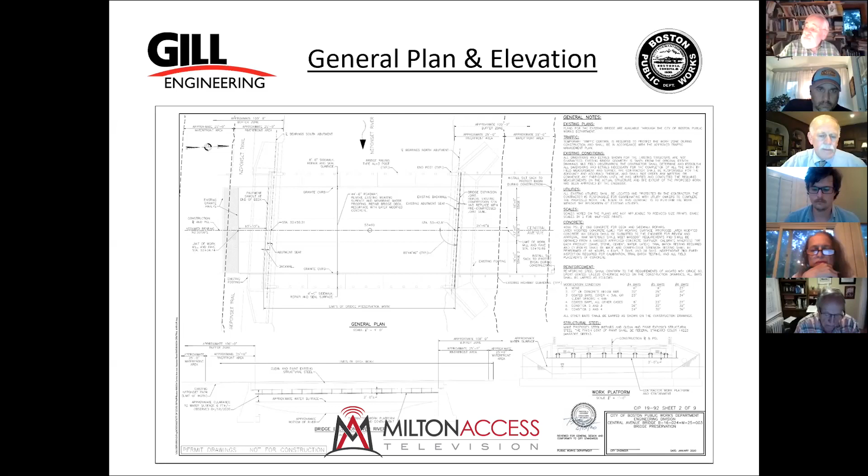Yep. So this shows the resource areas and the limits of work. On the Milton side, we'll be limiting it to the path on the Neponset Trail. So that's going to be the extent that we'll be doing the resurfacing. So Joe, if you want to move on to the next slide. This just shows the cross-section and the general staging of the work. Everything, again, will be contained primarily within the road surface on the top side. A little bit of maintenance work will be done on the sidewalks.

Joe, if you want to proceed. So this is a photograph of the top side. You can see the condition of the pavement, and that's the primary focus, again, that we'll be doing here. Joe, if you move to the next one. This is the underside. So from here, they'll be slinging a work platform, and the steel beams will be cleaned and painted. And in this view on the right, you can see the bucket when we were out with the bridge snooper doing the inspection.

Joe, if you want to move to the next. And this is just a view of the traffic setup they'll be using. The city will be coordinating with the MBTA on relocating the bus stops and accommodating pedestrians. Preston, one other question. I should know the answer to this, but I don't. And that is, what's the status of the sewer relocation project that put the pipe over the top of the bridge? I can touch on that.

MWRA issued a notice to proceed, I want to say the 6th, whatever last Monday was. Their intent is to run the bypass on the north side, I believe. It'd be north, or up in the picture that we're looking at now. Their plan is to be out there until about the end of the year, at least for this particular portion of the job. We're looking to see if some of our work can happen concurrently. The topside work obviously can't while that's there, but we might be able to do some of the underside. So we're working that out with our contractor to see what they think is feasible, and we'll talk with the MWRA to see if that works for all involved.

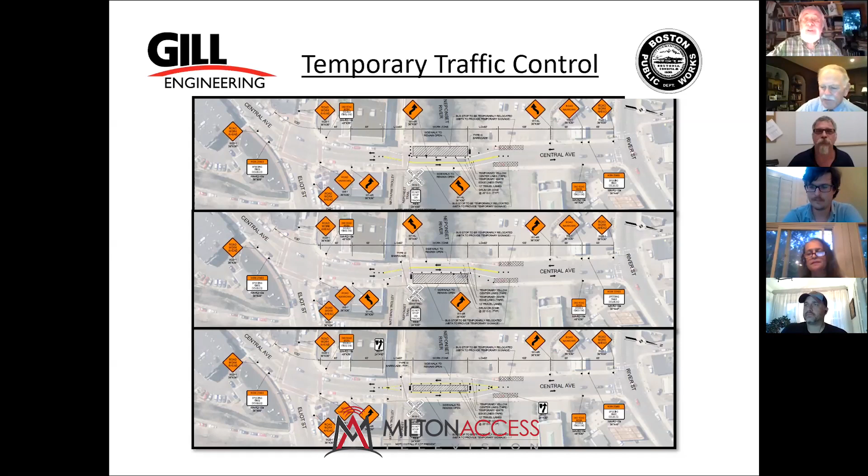Thanks so much, everyone. Thank you. Thank you. Good work. Have a nice night. Thanks. Thank you. Yep. All right. That'll be a nice enhancement. Yes.

Third on the agenda is a request for certificate of compliance at 750 Randolph Avenue. That's the gas take station. And Shauna, are you there? Can you see the VHB screen? Yes, I can. Great. For the record, my name is Shona Patasteas. I'm with VHB and I'm representing Boston Gas Company.

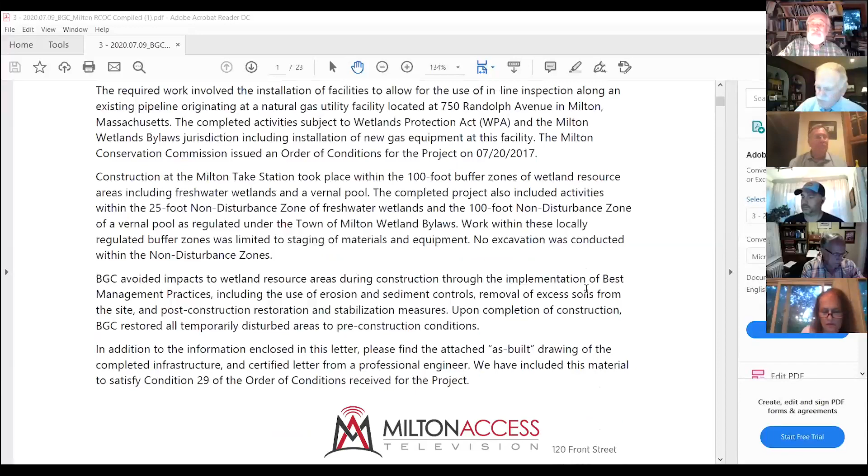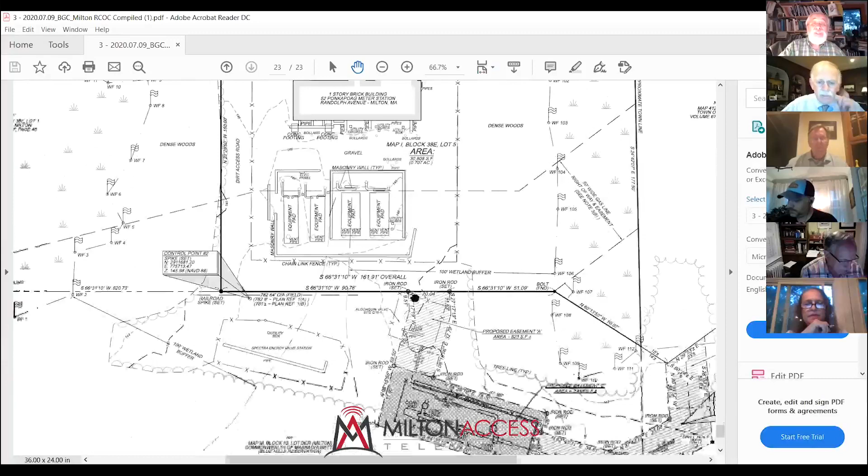It might be easiest, Steve, the very last page is the as-built plan. I can kind of describe the project. Okay, we'll get there in a moment. There we go. Let's see if I can zoom in a little bit for you. You want to go there, right? Is that correct? Yep. Good. Excellent. How's that? Great.

So this project started in 2017. It was an upgrade to an existing gas line that's in the area. It's a station that's off of 750 Randolph Ave, but it's right at the northern extent of the Blue Hills. It's behind a golf club up there. The name of it is slipping. Quarry Hills. Quarry Hills, that's it, yep.

The project was to build a PIG receiver. PIG is an acronym for Pipeline Inspection Gauge. It is above ground infrastructure that essentially allows you to put a tool into and out of a pipeline that cleans, that inspects, and is generally an upgrade versus the current inspection techniques, which I think are X-rays. There's a number of different above ground methods. So this is an inline, interior pipeline inspection tool.

They built a receiver in the gravel yard outside of the station here, and also changed out the elbow, the bend as it goes around the corner and up toward the north. The town municipal line is right in the elbow there. The Milton side of the work was really in the 100-foot buffer zone.

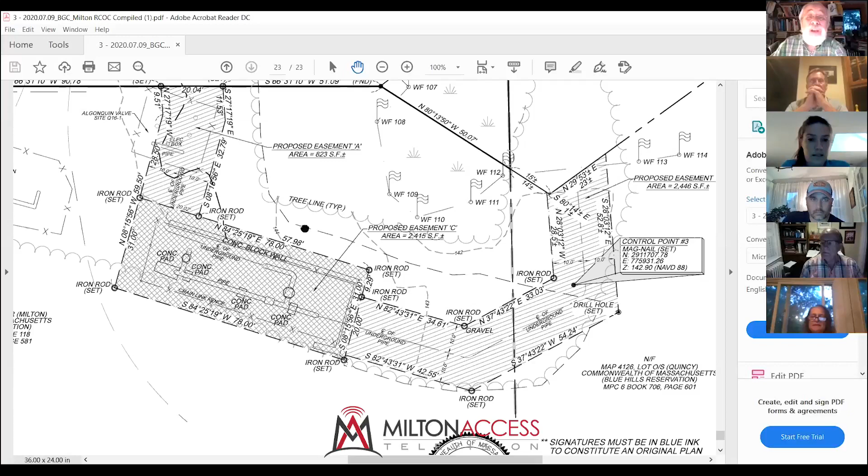And when I visited on Saturday, it was a very warm day, and I did see a spotted turtle moving from the east to the west across the access road, which is just to the northwest of this location, which is sort of neat.

Did we lose John? I think John and Ingrid. Yeah. Very curious. Here. John's on, good. I see Ingrid. I don't see John. Huh. John's muted. Okay. I wonder if that happens automatically. He came back. I'm sorry, I was actually talking there for a while. My internet crashed and I picked up another connection, but I was able to hear everything. Okay. Did you want to repeat what you had to say, John? No, I was just asking if there were other questions from commissioners or abutters and members of the public. It doesn't sound like it.

And Steve, I had the one question, and I may have missed this when my system crashed there briefly. The yellow cones that were going to be removed. Oh, not yellow cones, orange fence. Orange fence, okay. A little bit of orange fence. And Shauna has said that they will take care of that. Yes. Are there any other erosion controls still present, or have they all been pulled at this point? Everything's been pulled. And that fence was probably 50 feet off the access road to the north. Okay, that's where that fence is. On the ground, of course. Steve, you found your way out of that place. Good place for a fence.

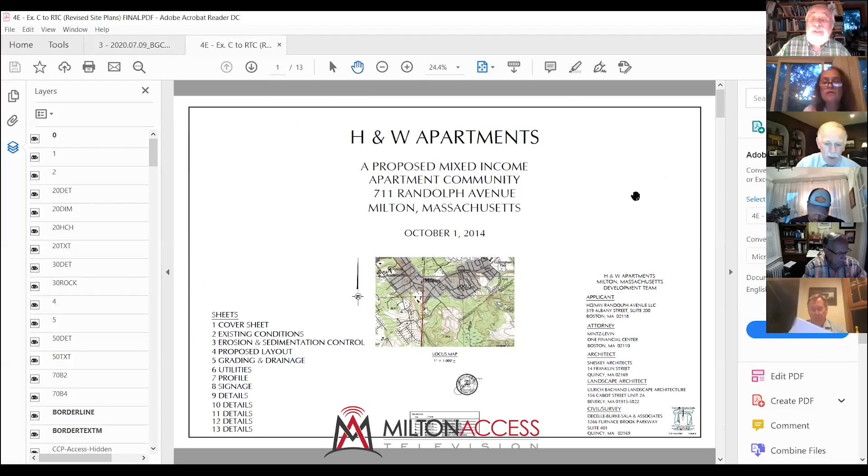All right, next on the agenda is number 4. That's notice of intent 693 to 711 Randolph Avenue. This is a continued hearing. Okay. All right. I'm going to put up the plans, I guess, right? How's that? I think so. I'm sure we're going to be using them. Yes. Okay. Let's see. Gesundheit. Excuse me. Thank you. And share screen. Come on.

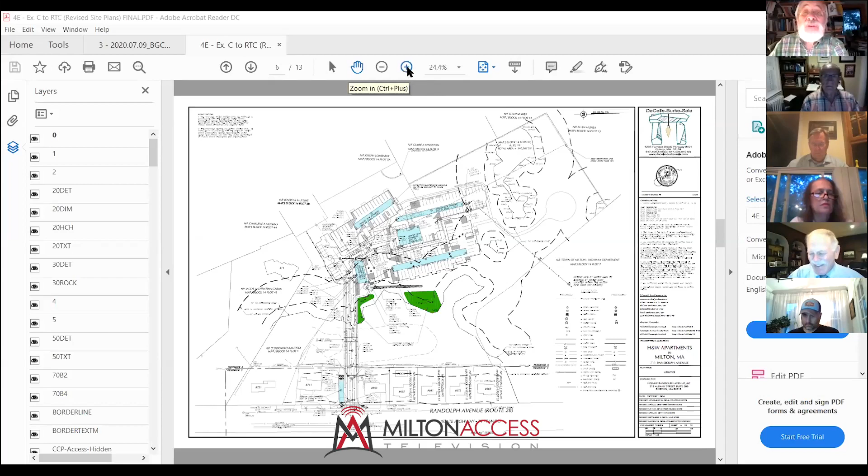And do you see it up on screen? There's a plan. Is it shared? It is shared. It's too small for me to tell what number that is. Happens to be one of the plans, that's all. One of them, okay. Is there a place you want to go, Brian, or anybody with you? Well, Scott Morrison is on the line. Jim Burke can't be with us tonight. But Mr. Chairman, I didn't know that we needed to make a presentation. We just received these materials. We can certainly speak to them at a very top level. But we had assumed that the commission was going to continue to ask its questions this evening. Yes, and I understand that completely, and I think that's fair. I don't have a particular agenda, but I note that the questions were asked, and I'd rather the questions were addressed in written form.

My initial concern was that at our last meeting, I indicated that I had a couple of high points. One was, is it constructible, given what I anticipated would be a collapse of the trench. And I think that has been addressed in terms of metal sheeting, box culverts, and the plywood. I don't get that one, but putting that aside for the time being. My other major point was a hydrology study, and I'm still looking for that. I know it's kind of swept into the alternatives analysis, but that looked to me more like a construction cost analysis. And I recognize that cost is a component of it, but I'm still looking for a hydrological survey that would indicate the impact of mounding. And that is the difference between the abutment structure with the culvert as opposed to the pier suspended plank bridge structure. I'm still looking for the water analysis of that. And Brian, you may be able to, or maybe Scott could address that. That is, if you have any intention to give us a hydrological study.

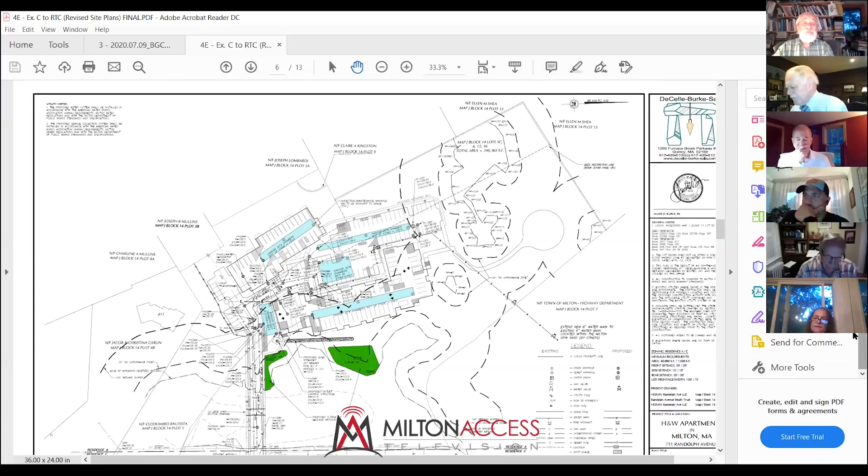Being an optimist, I think we'll correct this technical glitch shortly. But if it goes on too long, we can actually go through the report and the responses to the applicant's responses, because I did have some additional individual questions.

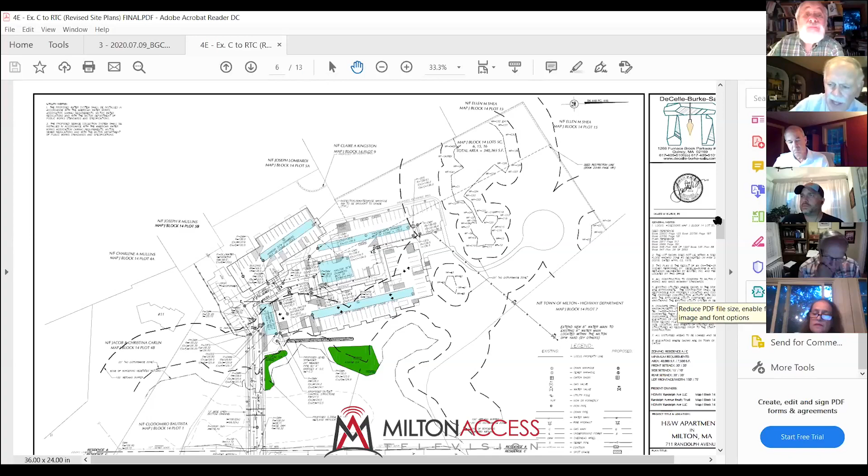And Scott, the first one that I've got is, there seem to be a number of questions related to separate and distinct wetland replication areas versus putting all of them into one contiguous area. And there seems to be some controversy over that. Is it possible from the site plan perspective to put the replication area into a contiguous plot? Yeah, this is the second round of comments we've got on that. It sounds like the commission and CEI's preference is that we combine that into one location.

Based upon the CEI letter, it appears that... Hello? Hello? I think we've got somebody. Hi, it's Matt. Okay, Scott, do you want to? Hi, it's Matt. Sorry to interrupt. I'm only on by phone, so the phone number had to be muted on your end. All right, fine. Scott, do you mind just deferring and let Matt address the first issue? That's fine. Hey, John, can you hear me? Yes. For Matt on the phone, it's just *6 to mute and *6 to unmute. So if you become muted, you just hit *6 and it'll unmute yourself. But you're unmuted now. Okay.

So I heard the question. Plywood will not work for the sewer extension. Our understanding, based on their presentation at the last hearing, is that for the utilities, they'll be using trench boxes. I think the only place the plywood may work is when they're installing the footings, which they clarified for the culvert itself would only be about 3 feet deep, and they're very narrow footings, only 2 or 3 feet wide. They may only need a piece of plywood at the end, inside the limit of the silt fence, to hold back that soil, because it's such a short, narrow excavation along the wetland line. For the deeper ones, they'll have to use trench boxes.

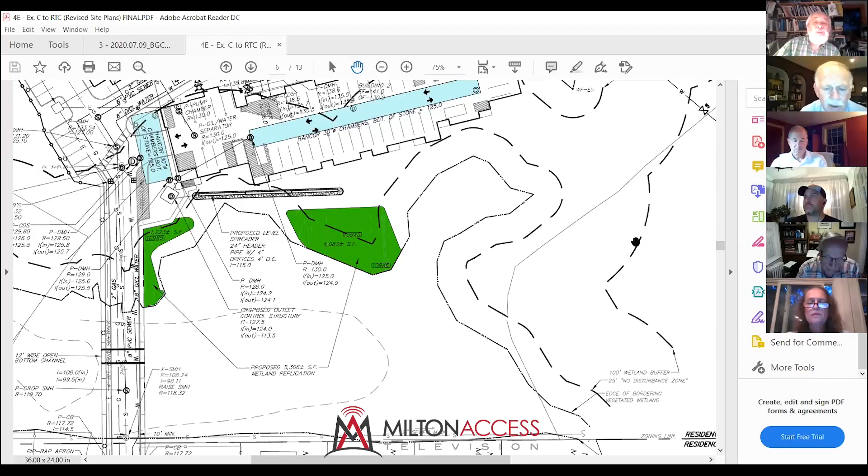Sure. Scott, do you have an idea which plan? Give me one second, let me see if I can flip through and find it. Let's see. It's not that one. It's not that one. Not that one, certainly.

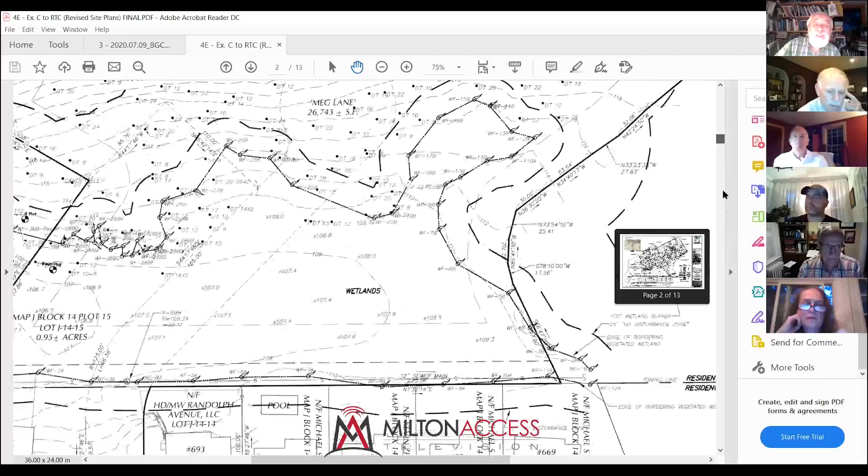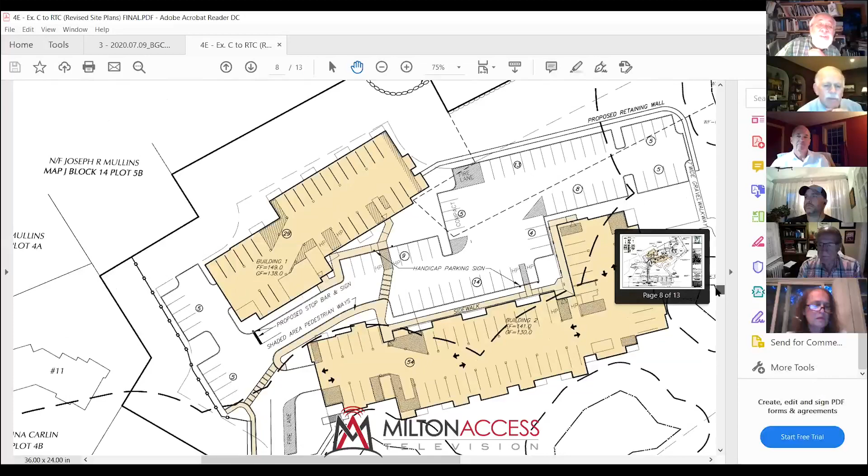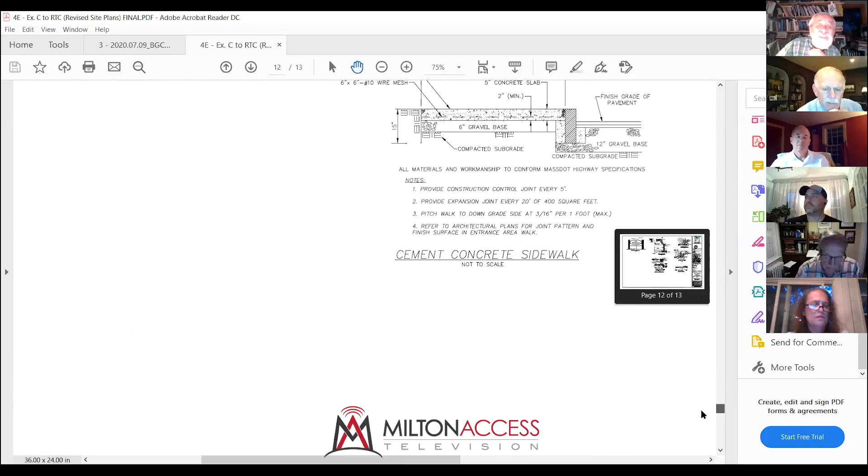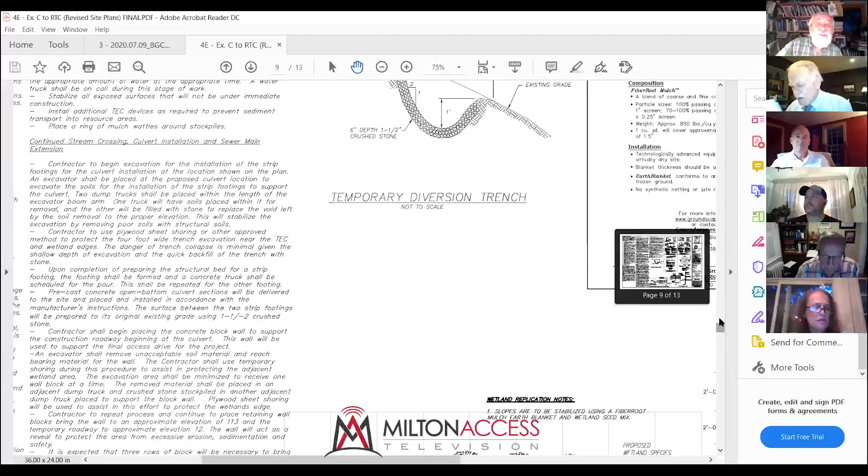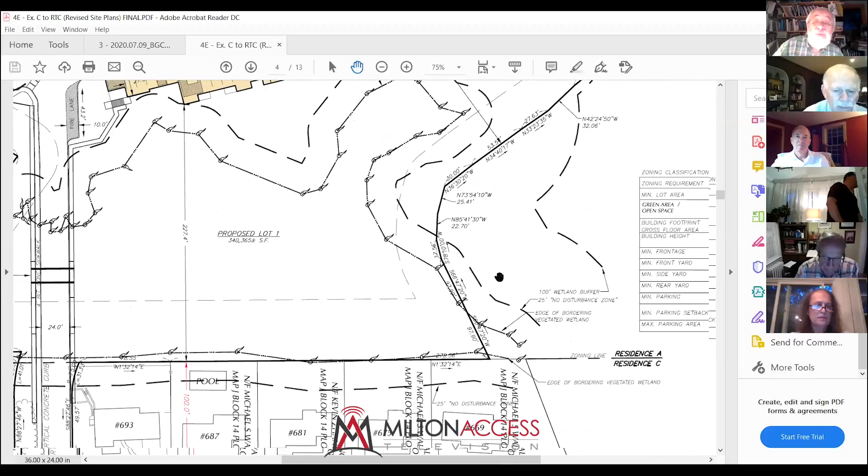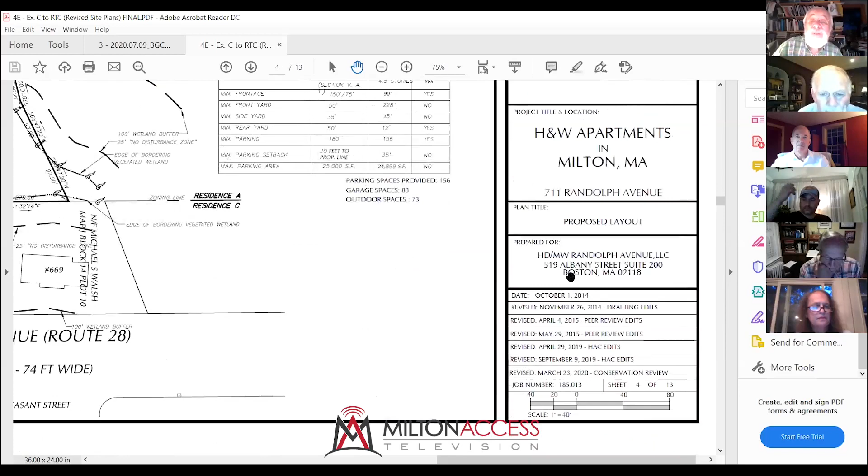Scott, can you try specifically to address this? Go ahead, somebody, try sheet 4. Sheet 4, okay, let's go up to sheet 4. Let's see, this is... that's 5. Is this 4 here? Let me just check and see if I can see what sheet this is. This is sheet 4 here. Okay, I'm on sheet 4.

Let me zoom out. I don't see snow storage areas on that sheet. Do you, anybody? I'm sorry, I may have thought I saw it on the wrong one.

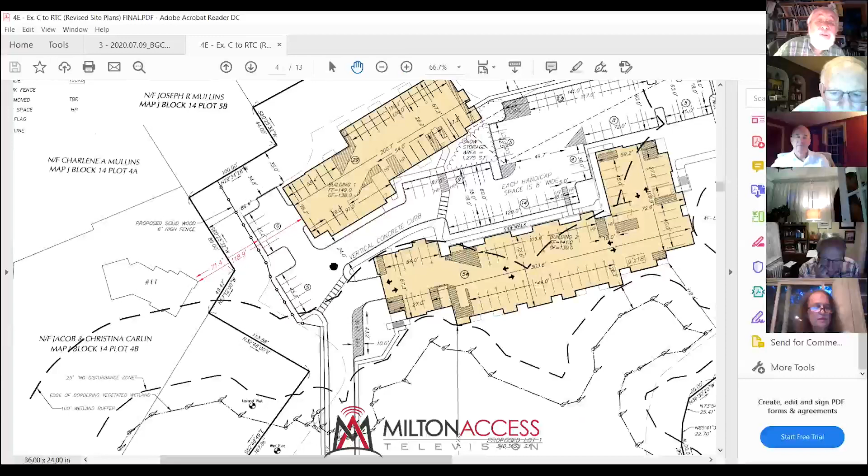Yeah, that's fine. I do recall that there were all the snow storage is within the vicinity of the parking areas. Yes, I recall the same thing, Scott. Somewhere, I believe there was some in here, and some in here, and maybe some in here. Is that correct? That's my understanding, yes. So the intent was, if possible, to get that to drain, melt, and then drain back through the stormwater system.

Right. Yeah. Yeah, I agree. And Mr. Chairman, apparently the O&M manual provides that only environmentally safe de-icing products will be used on the site. All right, thank you, because I did not have that in front of me.

How is that defined? Does the manual define what environmentally safe means? It's very subject to opinion. That was the question. Scott, I don't know if you can answer that. Did you hear, Hans? We can provide additional clarification of that. Fine.

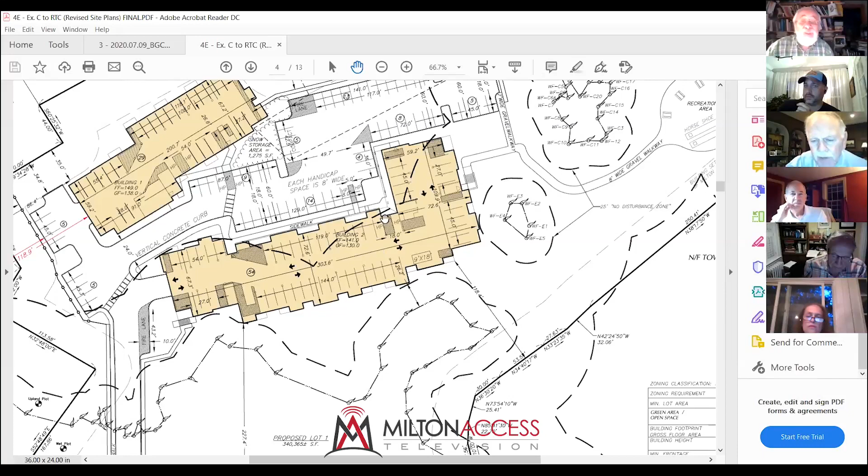Are you talking about 699 Randolph? I think it is 699. Abutters in general. Steve, if you can move that screen down so we can see Randolph Ave. Sure. Yeah, yeah, 669 here, right. 7-Eleven there, and there's a few houses in between.

Right, so last time, my memory is the commission pointed out that 669 -- sorry, I have the wrong number, I'm saying 699 -- had submitted an ONI, and I know Jim asked for those materials and got them from Kathy, so I know he's baked that into his thinking. All right, good, that's important to us.

And if I can go backwards just for a minute, because I passed over something. I see there are a lot of comments suggesting that the limit of work should be surveyed onto the plan. Is that an issue for anyone?

I was one of the ones who made that comment, John. I think Hans made it as well, didn't you? Yes, I did. It's all over all the reports. Right, and I just didn't know if, from the applicant's perspective, there's any objection to that.

Right, so again, apologies for Jim being unavailable. We really need to caucus with him before we can answer that. Okay, but we will get back to you.

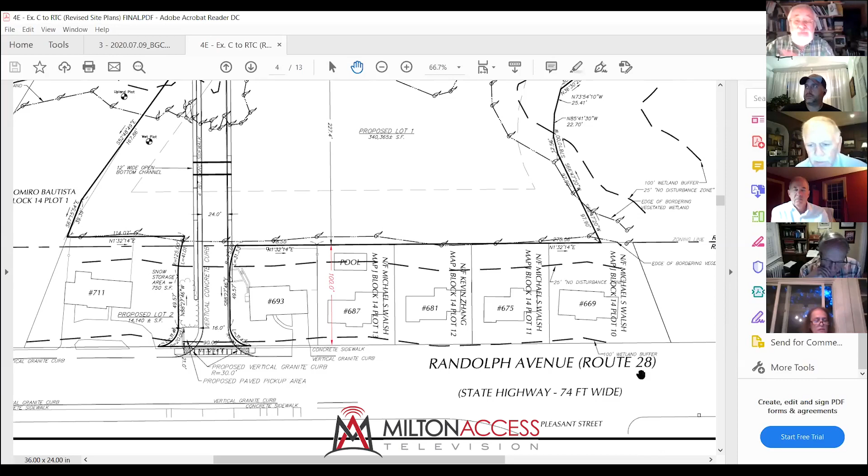And that might be a Jim Burke situation. Yeah, Scott, is that a Jim issue or a Scott issue? I think it's mostly a Jim issue, but we can make it very clear on the plans where the dewatering's going to be located, so there's no question about that in the future during construction. I don't see an issue there at all.

Okay, all right, well, just put that on your list of things to address, if you would, please. Hans, did you have any other questions?

No, I mean, I do look forward to seeing what any revised wetland replication is proposed as, and appreciate the willingness to consolidate that. Again, I think most of the questions or concerns would remain to what the hydrology study or response is. And I think we can just go from there.

The shoring question, I think we should be able to condition that to make sure it's executed appropriately, which hopefully the contractor would do anyway.

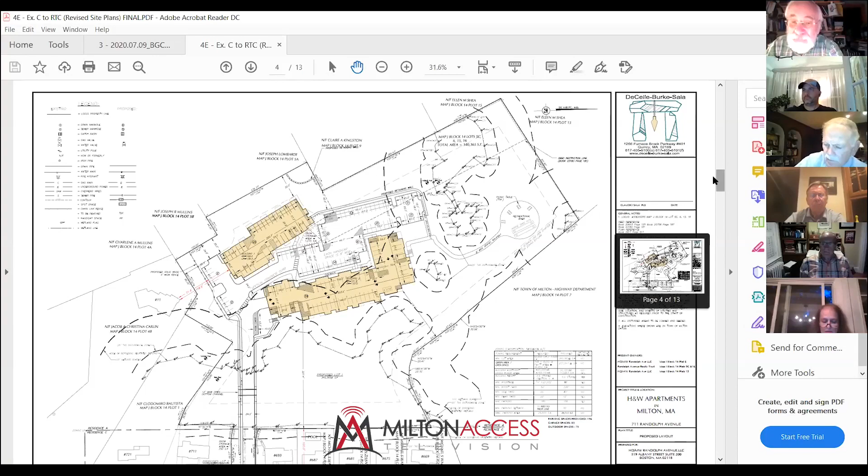Just generally, Jerry, those proprietary treatments basically use centrifugal force to separate the water from the sediments. Most of them run the water around in a circle, and the sediments drop out while the water stays. Would you agree with that, Scott? Yes, and just for clarification, those are shown on the plans, on the detail plans. So there'll be deep sump catch basins and then a proprietary treatment before it reaches the infiltration system. Right, okay, thank you, that's helpful.

Anything else, Jerry? No, that's it for now. Thank you, John. All right, Ingrid, I can't see you, but any questions or comments? Steve, here, can you- John. Oh, good, there you are.

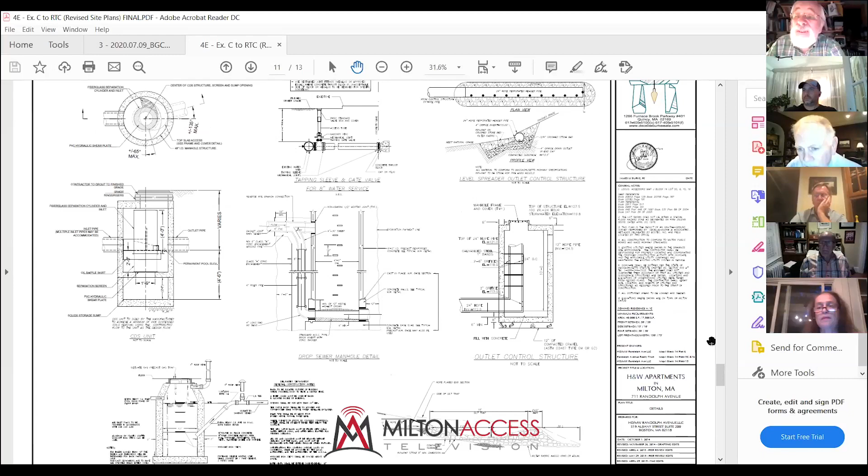I'm sorry, did you say you did have some questions or comments? No. No, you don't, okay, all right. And Arthur, I can't see you, but I think you're there somewhere.

I am, and I want to respond to the consolidation of the wetland replication plan, because approximately 50% of wetland replications fail within 3 to 5 years, and separating them out increases the chance of failure. Consolidation improves the chance of success. And I liked what Scott said about a buffer to protect the consolidated replication concept. That gives a greater chance of success.

And also a necessary ingredient is the periodic inspection, which I think I read in the documents prior to the meeting, which I think is a very positive feature as well. So it's on both the developer and on the Conservation Commission post-development to make sure that that replication area succeeds.

I just wanted to mention something to Arthur's point. Often with areas this size, an extended period of monitoring to make sure that it grows, and some backup plan for if the replication area isn't taking, is written into the order. We've seen that before. Beyond the usual 2 growing seasons.

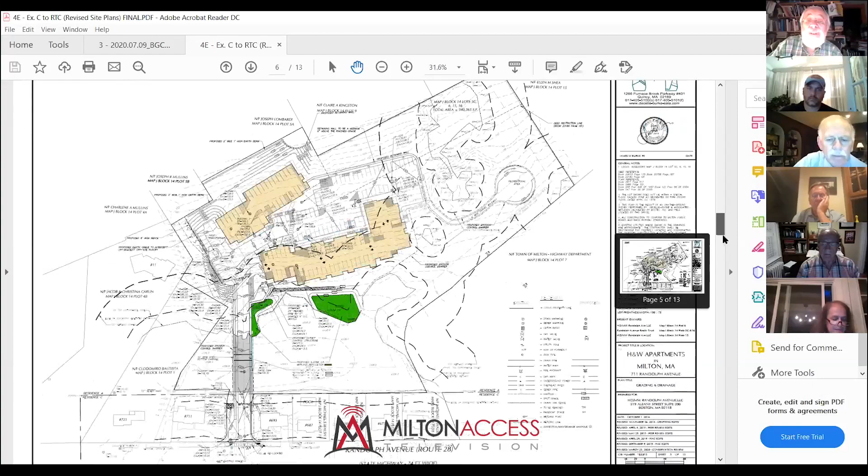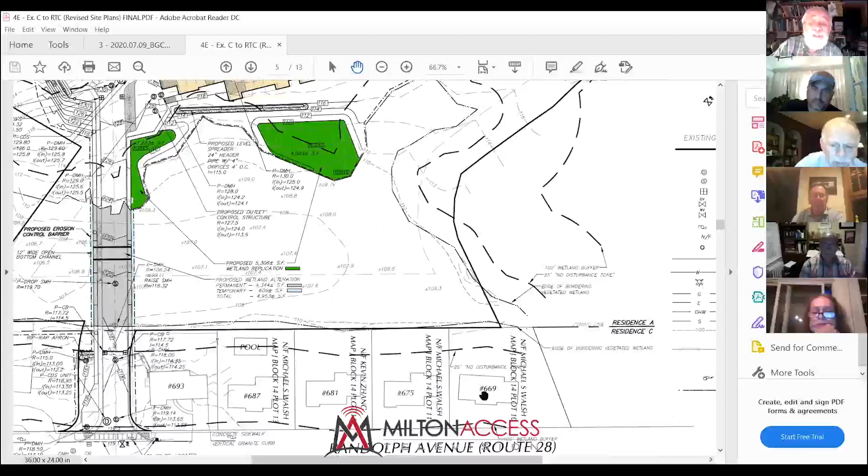Sure. Yeah, that'll do right there. That's fine. How about this one right here? Yeah, if you were to zoom in a little bit on that corner that's closer to 669. There you go. Right there. 669 is there. Yeah, so that's perfect.

So in general, what we're talking about is the portion of the wetland that goes from where you can see the 114 contour there, right? Just right here. More or less from there, perpendicular to the property line, following more or less the 114, and then dropping down to where the wetland line merges with the property boundary as you're going towards 669. That's about 7,000 square feet to work with.

So again, just in the interest of being complete, the reason that's good is because you've got the existing wetland there. Above it, it's more distant from the direct impacts of the proposed development and the buildings. It gives you the opportunity to do it all in one place. On the other side, it places a little more burden on the town's property to the north.

Mm-hmm. By building a replication there, you're giving up some of the forested buffer to the wetlands on that side, and you're making that new wetland fairly close to the town's property there. So it's just something to keep in mind in terms of keeping good controls on potential encroachment or issues that seem to be happening now up close to that property line. So it's just something to keep in mind as you're thinking about that moving forward.

Well, on balance, with all those things considered, I do think it's probably a good idea to move it over there. The upside seems to far outweigh any downside in my mind, but I just want to point that out. Thank you, Bob, for pointing that out for us.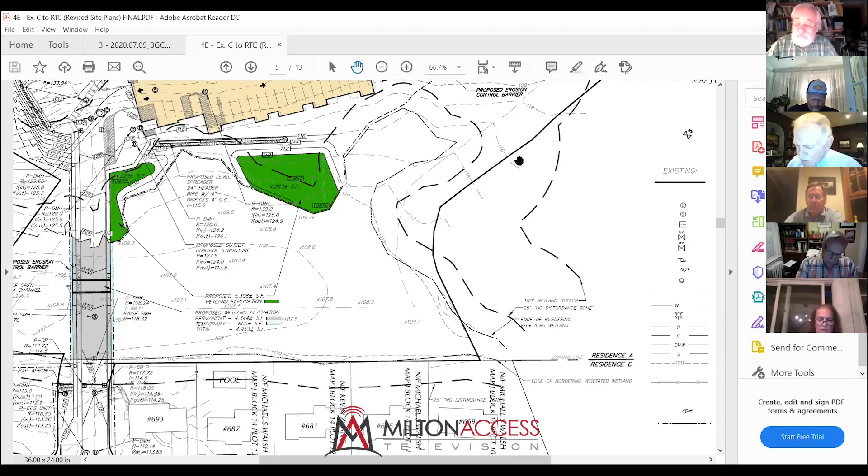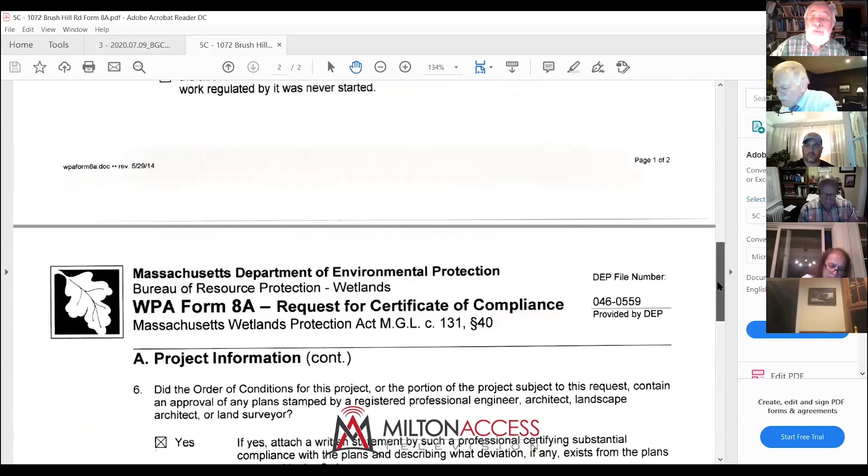We can move on to the agenda. I think next, number 5, request for a certificate of compliance at 1072 Brush Hill Road. 1072. Okay. Do we have anybody appearing for that? Not to my knowledge, John. I've been out to see the site. It looks very good. And do we have a plan? I'm looking for the plan. Yes, did you see a plan? Yes. We had it in hard copy. Okay, very good. I don't believe I have it in digital form here.

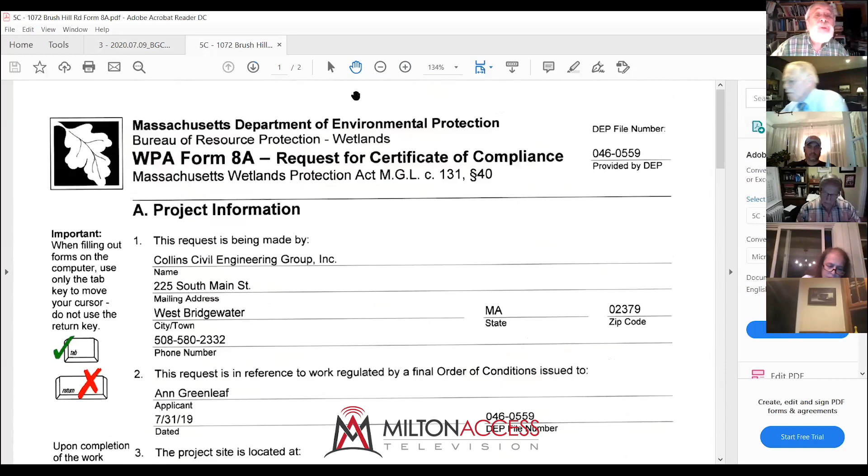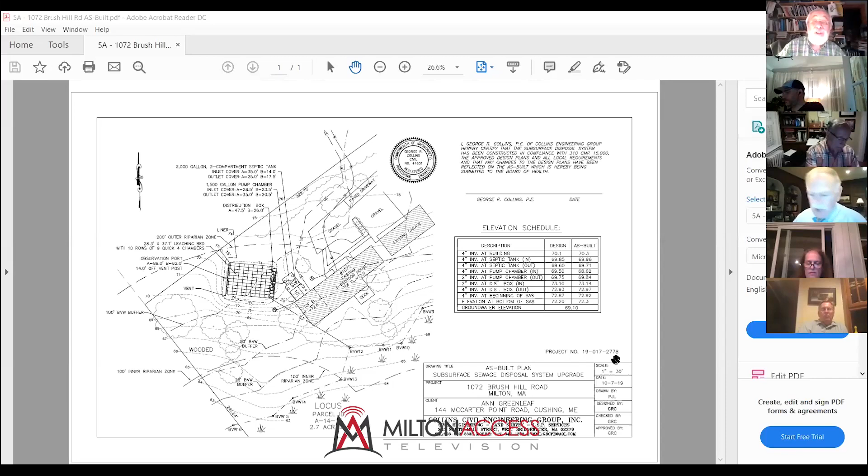In fact, oh, wait, I may have it. Okay, let's just check. That's not it. One moment. Just give me another few seconds here. All right. And this is the site where this was the better alternative than connecting to a line. Yes, that's correct. And I'm going to share the screen now. And can you see that? Clearly. Yes. The house was over to the bottom right-hand side of the screen. And we walked over to another, across the way. This was right where the big beech tree was. Yes, I remember that.

Oh, I'm sorry. Here's the garage. Here's the house. This is where the beech tree was, and it's done very, very well. And it's growing in just fine. And we have in our hands in the packet the submission by George Collins indicating that he's inspected the site and found it to be in substantial compliance with the approved plans, which is our trigger for considering a certificate of compliance. Are there any questions? Are there any abutters or members of the public that have a question or would like to make a comment on this issue?

So I suggest, hearing none, that we can proceed to issue the certificate of compliance based upon the letter from George Collins and the inspection by Steve Ivas. Is there a motion to issue the certificate of compliance? So moved. Thank you, Arthur. Is there a second? Second. All right. Any discussion? Hearing none. All in favor, say aye. Aye. Any opposed? Hearing none. Unanimous. So we can issue that certificate. Thank you very much.

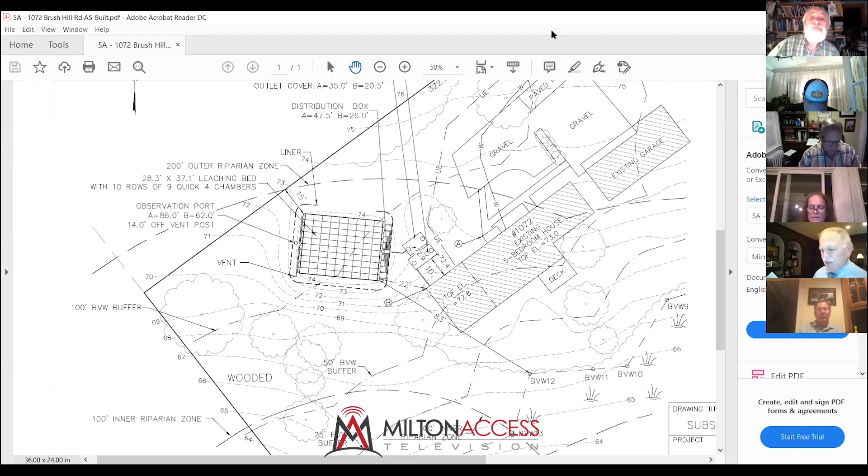Next on the agenda. John, can I ask you a question before I forget? While you're mentioning the issuance of the certificate, do we individually, post our virtual meetings, see Kathy for signing the appropriate paperwork? No, that actually is a problem. I talked to her about that today, that we no longer have the added benefit of the police cadets, because apparently there were 3 police cadets and all 3 of them went to the State Police Training Academy because they had a new class come in. So we have to make arrangements to stop by the DPW, make a call in advance, make an appointment, and then sign. Unless we have a site walk, we can do it at the site walk. But I don't think we've got one coming; we might.

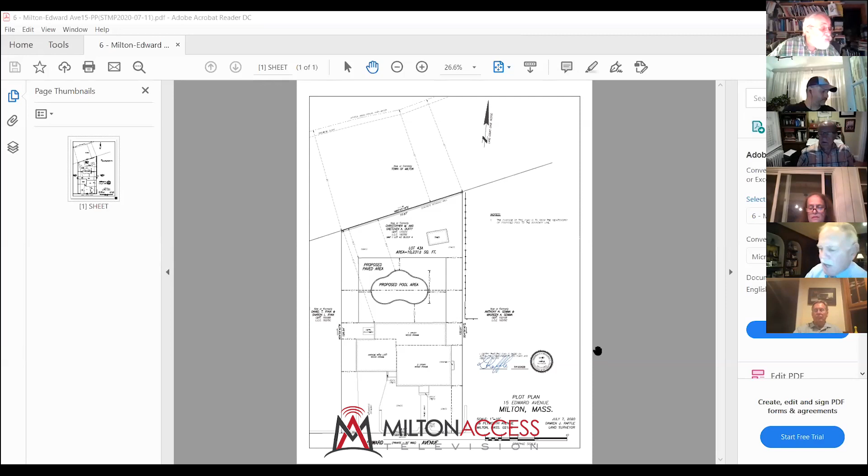So if we don't have a site walk, then Arthur, I think you're correct that we'll have to each individually stop by the DPW and sign these documents. That's very helpful. Thank you. Sorry about that interruption. Oh, no. But I didn't want to forget to ask.

Okay, next is notice of intent at 15 Edward Avenue. And for those members of the public, we did attend a site walk 2 weeks ago? Yes. And went out and inspected the property. It looked to be an appropriate project. The problem was that it was sort of informal drawings. So we asked that we get a professional engineer with a stamped plan to submit that with designated distances from the wetlands. And I think that the homeowner has done that.

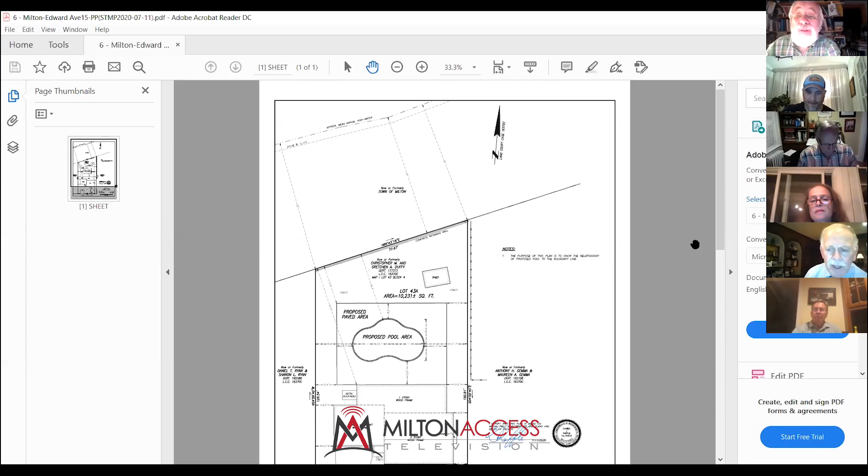Am I correct, Steve? Yes. Do you see it on your screen? I do indeed. Yes, they have. I looked at it before. It looks appropriate to me. And having inspected the site, it appears to be an appropriate plan with our usual conditions of keeping any equipment used out of the buffer zone overnight or for any refueling purposes, and to have proper sedimentation controls in place. I actually don't see that on the plan, but I think we could make that part of our order of conditions. Yes, they're not on the plan, John, and we certainly can make it part of the order.

All right. And also for the public's benefit, when we were at the homeowner's site, we asked and he responded that this is a closed filtration system with cartridges so that there'll be no discharge of the pool water, which often has residual chlorine or bromine or something. So this is a closed system, so that should not be an issue. And he did present the manufacturer's name, and I think he showed us some specs. Yes, he did. So I'm satisfied that this is an appropriate application to issue an order of conditions.

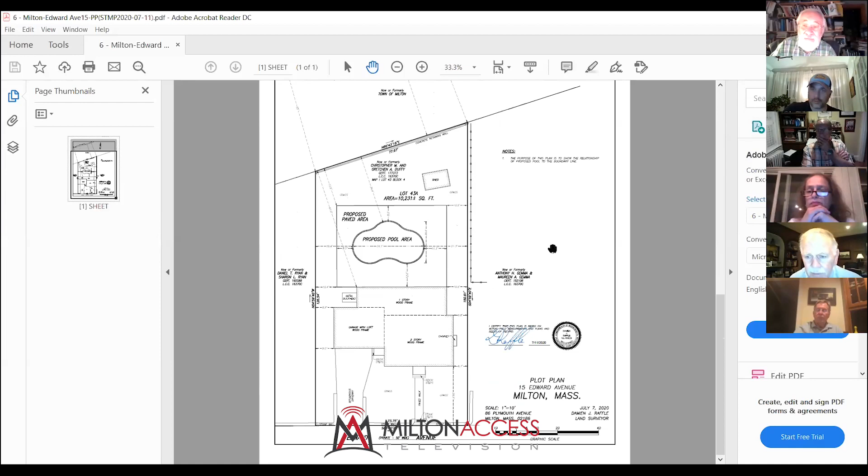But before we do anything, I invite any questions, comments. I forget who was there. I know Wendy was there, and Ingrid, you were there. Correct? Actually, I was not able to attend. Right. So, no other questions? Steve, do you have any comments on this? No, not at all. In fact, the measurement from the stream to the back lot line there is very close to what you and I both measured when we were on site. Oh, that's a very good thing. It was awfully close. Yes, exactly. At least it confirms what we saw in the field.

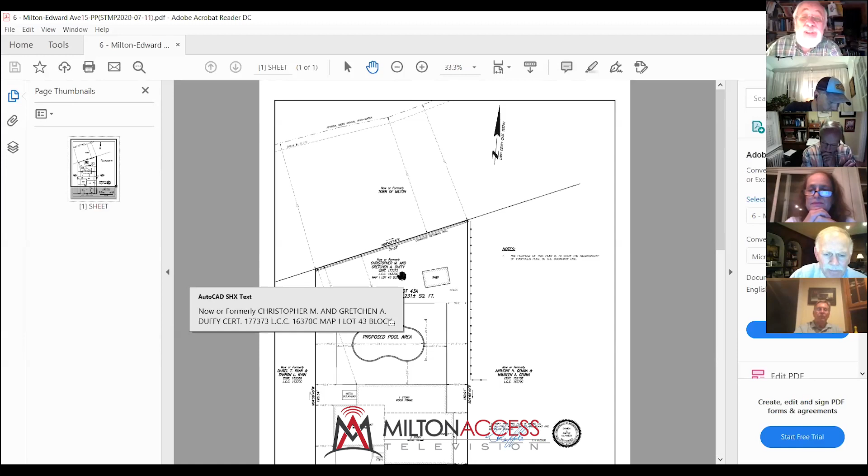Right. And just so that if anybody is concerned with a 25-foot non-disturbance zone, if you measure on the left-hand corner of the pool patio, the paved area, I can't read it on this, but on the plan that I have here at the house, I think it says like 18 feet or something. Maybe 19 and a half. 19 and a half, but that's not where the 25 foot is measured from. Right. It's this area. So you have to add those two together so it is sufficiently away from the wetland resource. Yes. Any other comments or questions or suggestions?

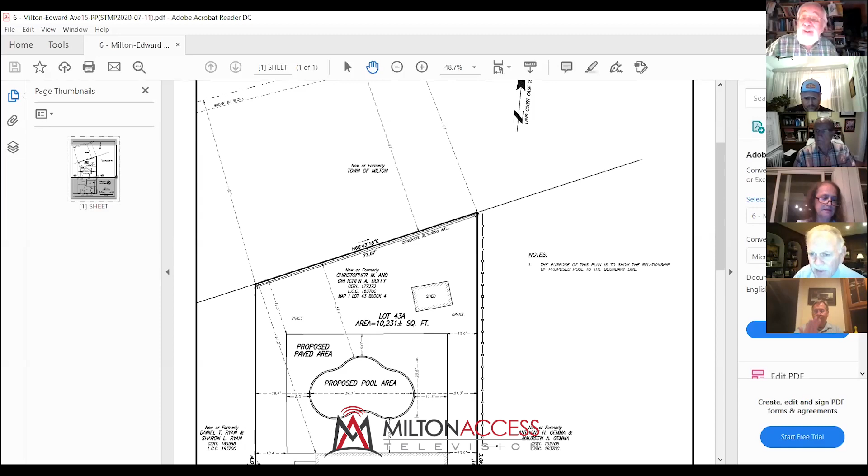Hearing none, is there a motion to approve the order of conditions for 15 Edward Avenue with the stipulation that the homeowner adds the sedimentation and erosion control line, and we have our usual standard requirement that there'll be no storage of gas-fired or diesel powered equipment, and there'll be no refueling within our buffer zone. So moved. Okay, is there a second? Second. All right, any discussion? All in favor? Aye. Aye. Any opposed? Hearing none, that's unanimous. Thank you very much, everybody. Appreciate it.

Moving on to 23 Hurlcroft Road. That also is a notice of intent, and this also is a place that we visited at a site visit 2 weeks ago. And at the time, everything seemed to be in order. I think we had adequate plans from the stamped engineer at the time. And I don't have any questions, but some of the other commissioners might. Anything? None from me. Ingrid, I think you were there. Yes. All right. And it's outside of our 25-foot zone because we measured from essentially the toe of slope. Yes. And the proposed addition is outside of the 25-foot non-disturbance zone.

Any questions from commissioners? Are there any abutters that have a comment or question? Hearing none, I'd entertain a motion to issue the order of conditions with our usual, what I call boilerplate provisions, that is no storage of gas or diesel powered engines and no refueling within our buffer zone. And with that, entertain a motion to issue the order of conditions. Is there such a motion?

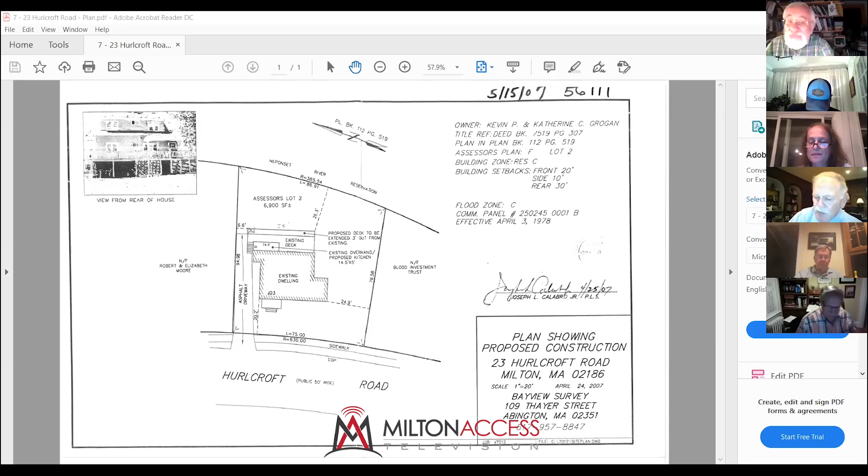So moved. All right, is there a second to the motion? Second. All right, is there any discussion? Hearing none, all in favor, say aye. Aye. Aye. Aye. Any opposed? Hearing none, that's unanimous. Thank you very much. Thank you. All right. Have a good night.

Thank you. Next on the agenda is notice of intent 175 Milton Street. I believe by email today, there was a request that this be continued until the August hearing, to which we assented. So that will be on August 11th. Next on the agenda is request for determination of applicability 152 Robbins Street. Steve, can you get us up to speed?

This was a question that, I think everybody here has been there. And this is the garden. Yes, that's correct. The family's like plant, and it seemed to be appropriate. We just wanted them to move it 25 feet from the top of bank. Right, and they moved it 25 feet from the top of bank at B19. And I looked at it today and I said to Mr. Howe, I believe it is, guess what? 25 feet from B19 doesn't help us. It helps us with B18.

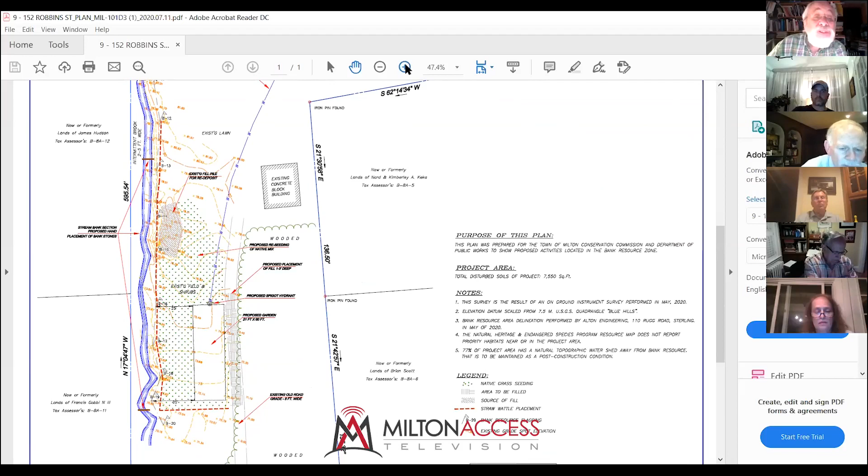So I said, have the surveyor move it as an offset to the entire stream and/or flags. And he could not do it for tonight, but he promised that he would. And so what I said was, maybe I can suggest that the commission take it up as a conditional: if they do have a 25-foot distance between every flag and the garden, then we would issue.

Did you check your email? Because I thought I got an email about 4:30 today. That's correct. That was from me, from him, saying the same thing. Oh, but I thought he had replaced it. He had created another plan, but only one of the flags was 25 feet away. Oh, okay. They all have to be 25 feet away. Indeed, yes. I got you. I said, just take an offset and then make the garden the offset at each one of the flags. So he promised he would do that.

So the commission could take a vote to issue the negative RDA, or determination of applicability, once the plan is correct. I agree with that. And we've all been there at least twice. And I think it's a grand idea to have a garden there. It fits within resource protection. I think it enhances the property as long as it's 25 feet away.

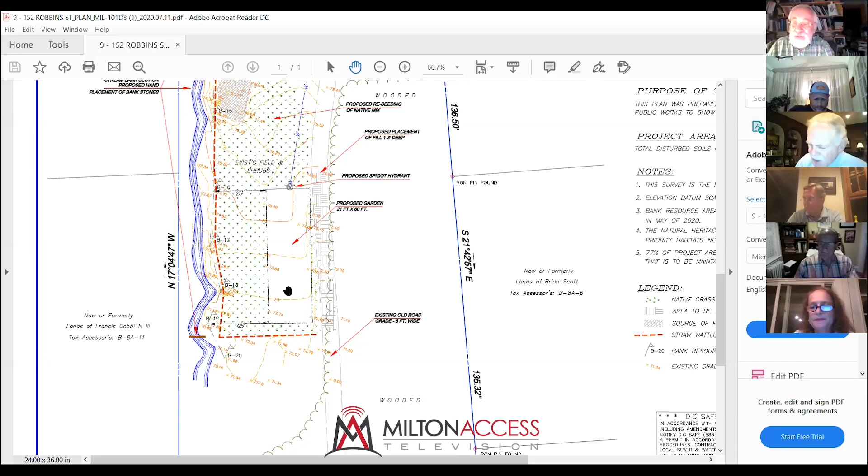Next on the agenda is 175 Governor Stoughton Lane. I'll disappear for a while because I think we're going to go back and talk about the proposed tree policy. Not in this one. The tree policy is next. Governor Stoughton Lane is on its own. What about Bradley Road? Oh, I'm sorry, 137 Bradley. What I was trying to do was skip over 175 Governor, and in fact, I skipped over 137 Bradley Road.

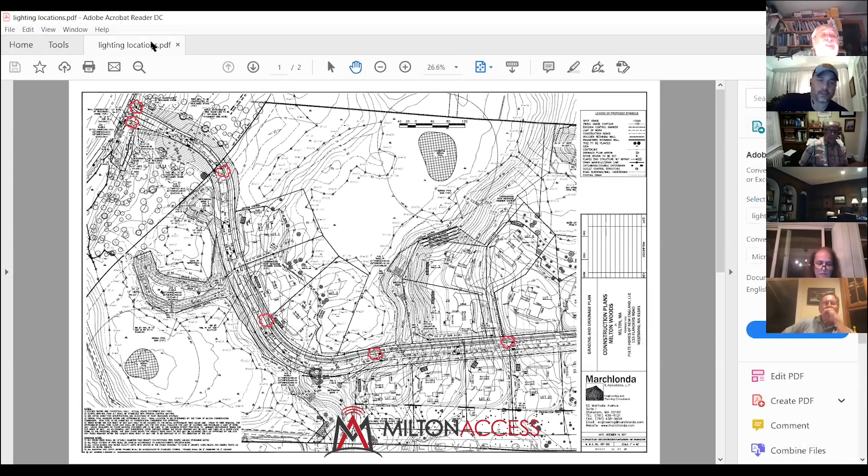There is a significant amount of light bleed laterally on either side, and as I said, it's clear that there's been attempts to rectify it, but my concern is that I don't know if those types of lights can in fact be modified to be dark sky compliant.

Steve, do you have the pictures that I had emailed to you? Yes, I do have the pictures, I'm trying to get to them now.

I think you've all heard this before from either Mike Rosati or other members of our team out in the field, but I'll repeat it so we're all on the same page. Because I heard there's been errors on both sides, but the real situation is that we proposed Pulte's standard, very attractive street light for this project.

We submitted it as part of our set of plans to the planning board. They had a black cap, they had the lighting source in the cap, they point down - very attractive.

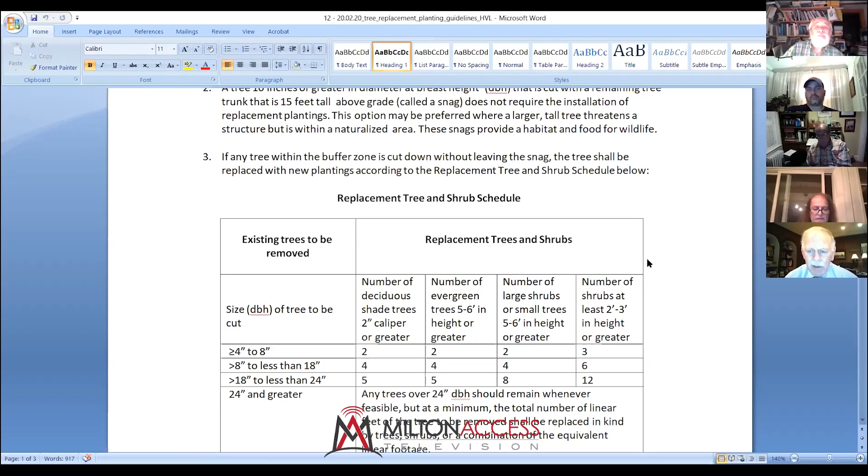I communicate with her, yes. I got an email yesterday. I did not talk to her yesterday, but she gave me a heads up that she would not be present for tonight's meeting. So I just wished her well. I don't know whether or not she'll be available for the next meeting or not, Jerry. Oh, okay.

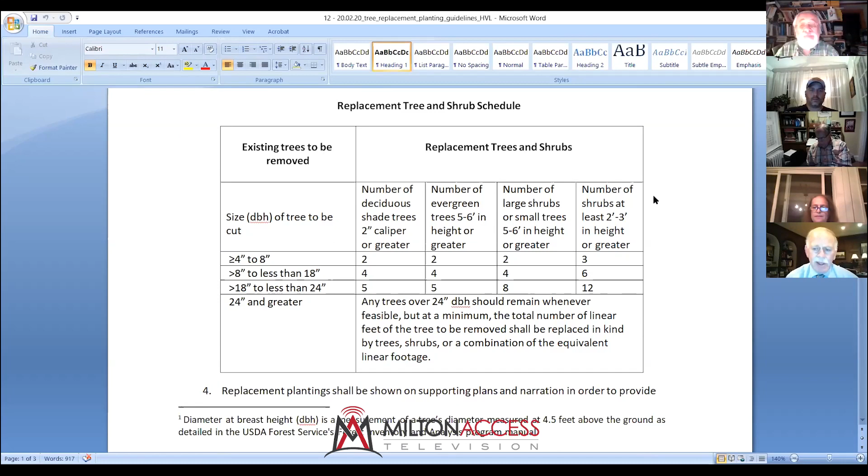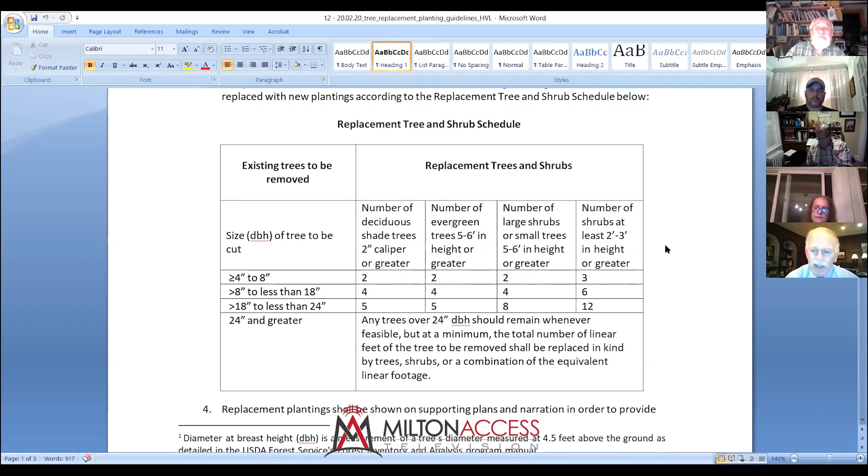But you are correct, it is near and dear to her heart, so we could probably start the discussion. It's not as if we have to vote on something tonight, and then we could reach out, not with a quorum, but just to get her view as sort of a subcommittee. She could express her views on this, because I have not spoken to her about this. I've talked to her a couple of times in the last two weeks. So why don't we start on this?

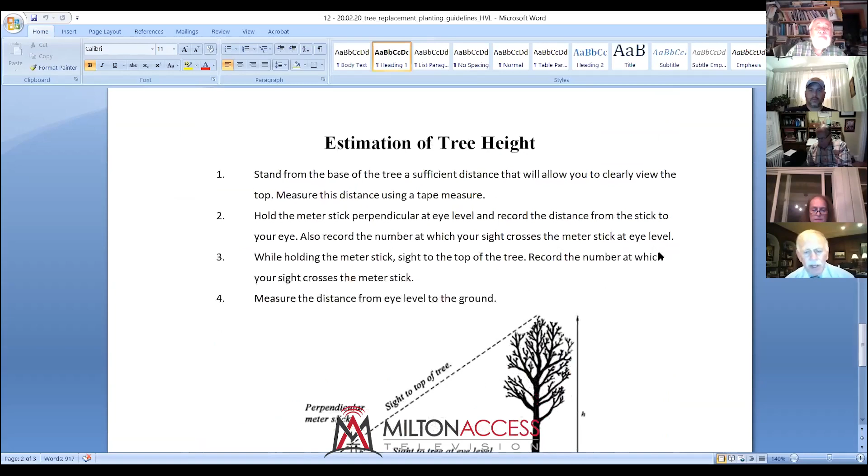By the way, just in terms of background, for a bylaw you have to have the approval of the town meeting. But for a regulation, it's our vote and then the approval by the select board, if they see fit to approve it to become a regulation, a policy. And I think it's probably a good idea, since we always talk about our uniform standards, to elevate those performance standards into a regulation. I think Hans has a very good idea.

Because sometimes we ask ourselves, is it 3-inch caliper or 3.5-inch caliper? And when we take a survey at a site, we want to know how many trees are being taken down. The question always becomes, do we mark all the trees over 3 inches, 4 inches, 5 inches? What is our standard? I think sometimes we've had a lack of uniformity in terms of the caliper, that it has to be of a certain caliper. So I think it's great to have this put out in writing.

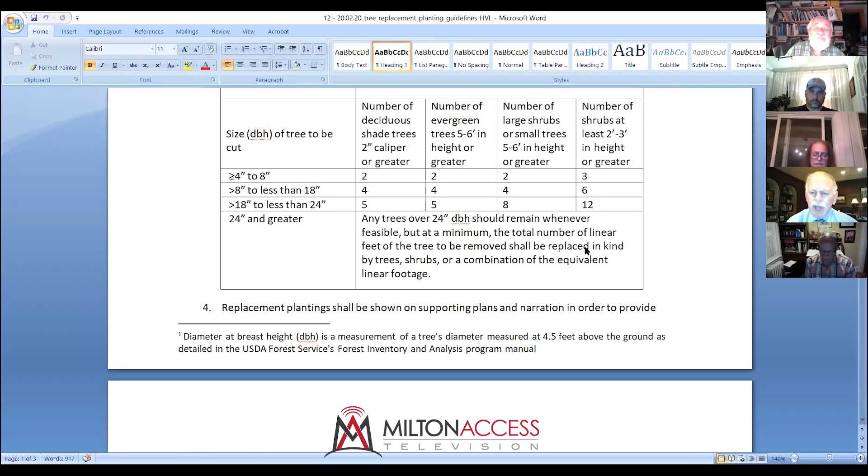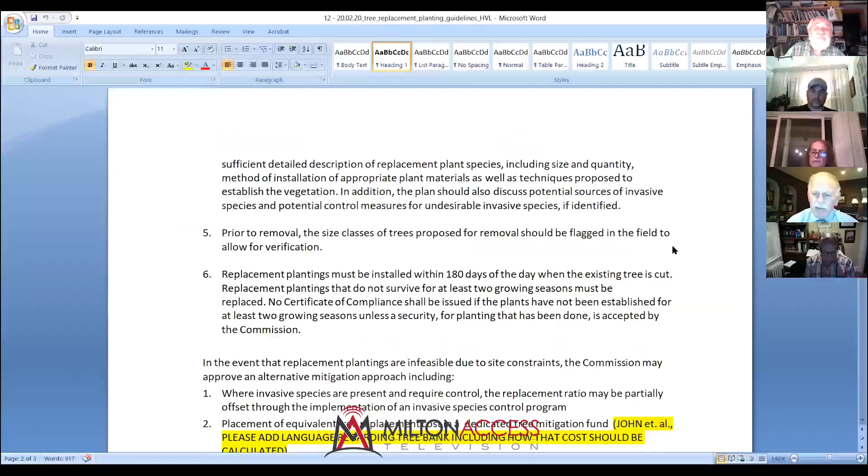In fact, somebody chastised us on not having it in writing. It was Mr. Jack Dolly from the Walcott Estates and the Carberry Estates. He said it's not in writing, but it may not be written, it's been pretty consistent for three decades.

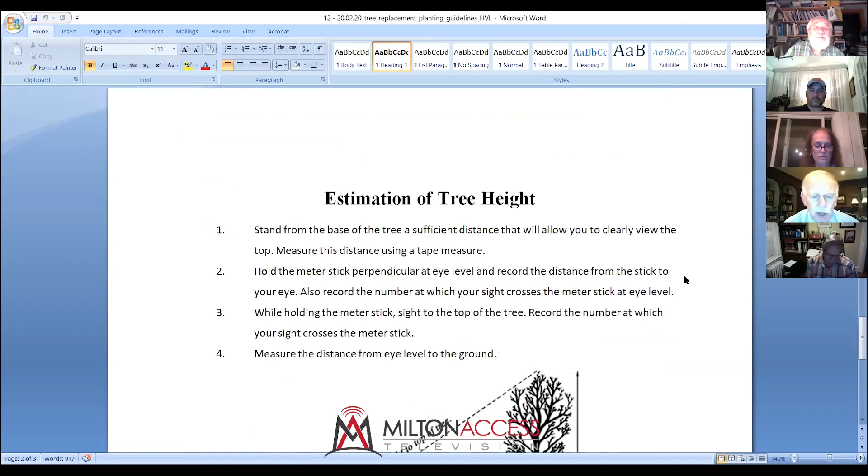So do you want to walk us through this, Hans, in terms of where we are? Sure, yeah. It again gives the general purpose of the tree replacement policy.

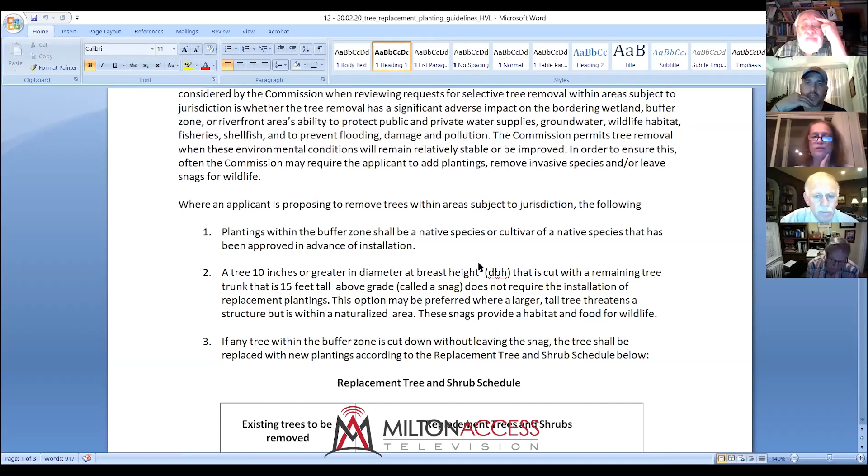There's always the question about jurisdiction and whether it's appropriate or necessary for a property owner to have to come before us for touching any tree within the buffer. I've seen a lot of other commissions do this just to provide this sort of clarification, with the understanding that the manner in which a tree is removed can have a significant effect on how much damage there is to the environment.

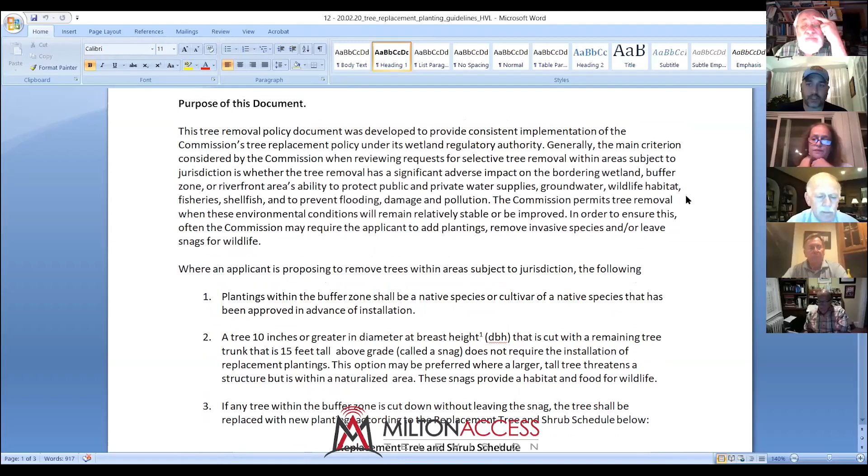Someone says we're just taking down trees, but there's a pretty wide range of effects that could occur as a result, whether it involves stump grinding, removal, size of the tree, and also what sort of mitigation may be appropriate. Some of this is language I've taken from other commissions that have similar policies. I believe part of it came from the towns of Weston and Needham.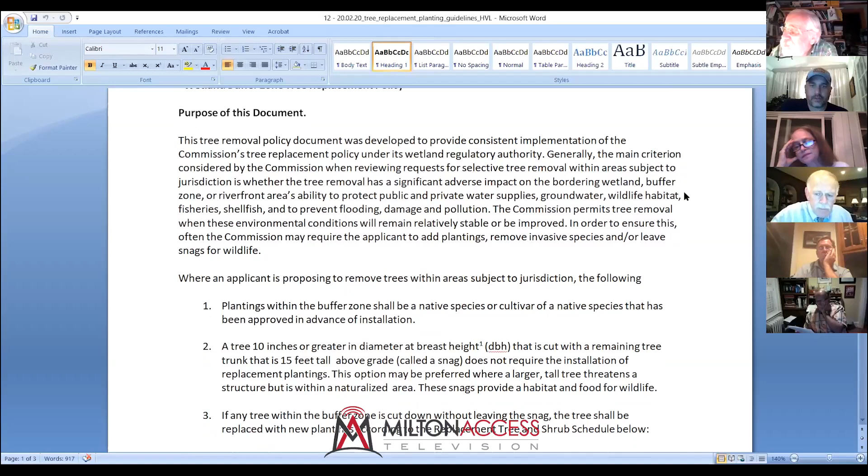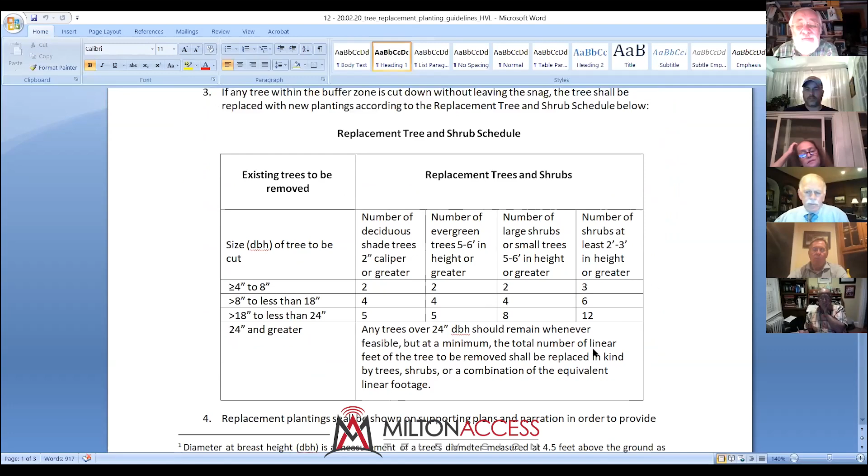Further down is where we get into the part that clarifies things, hopefully pretty well for applicants, where they can have a precise measurement of DBH so they can provide the mitigation as part of their application. This is how this works. It gives the options for the type, either deciduous, evergreen, or shrubs, and it gives different options in height.

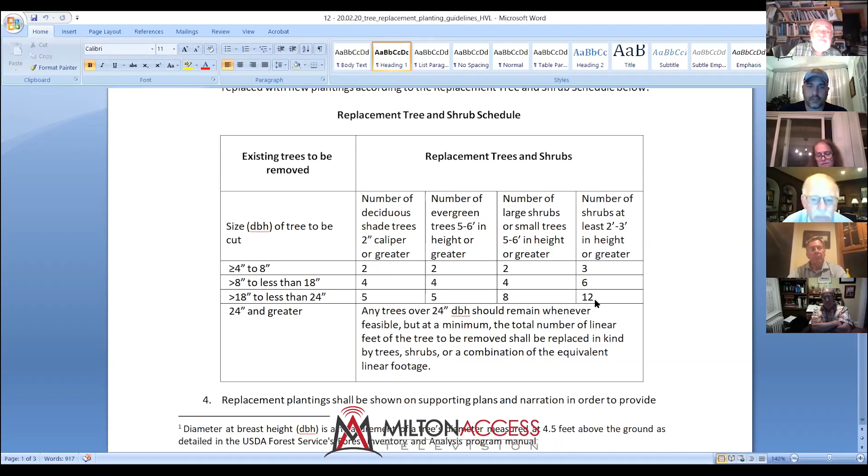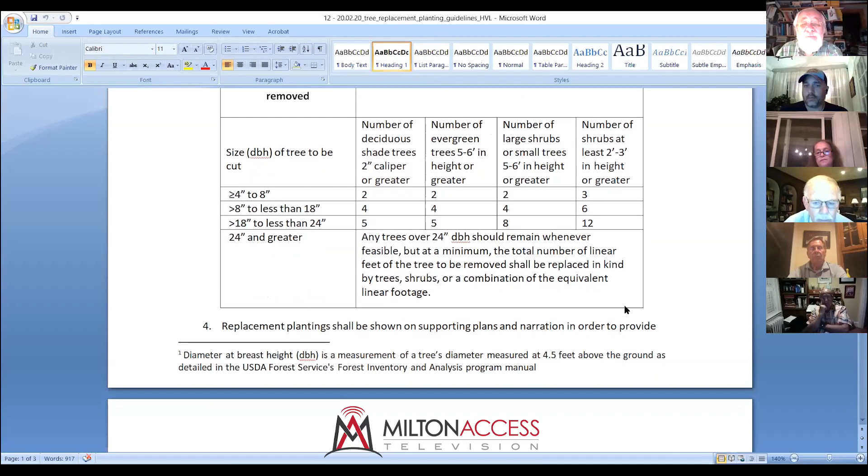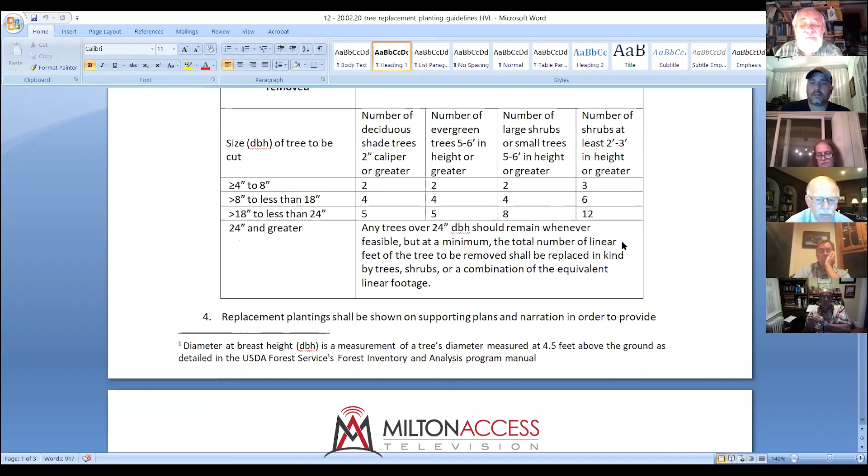I figured that variability would give options for various configurations for property type, to give as many options as possible. I know we've been trending towards allowing shrub mitigation as opposed to replacement in kind of trees. The one important thing is where we're dealing with trees that are 24 inches DBH and greater. There's significant biomass associated with those trees. I think the value there is higher, and it seems appropriate that would require a bit more mitigation than taking down a tree that's 10 or 15 years old.

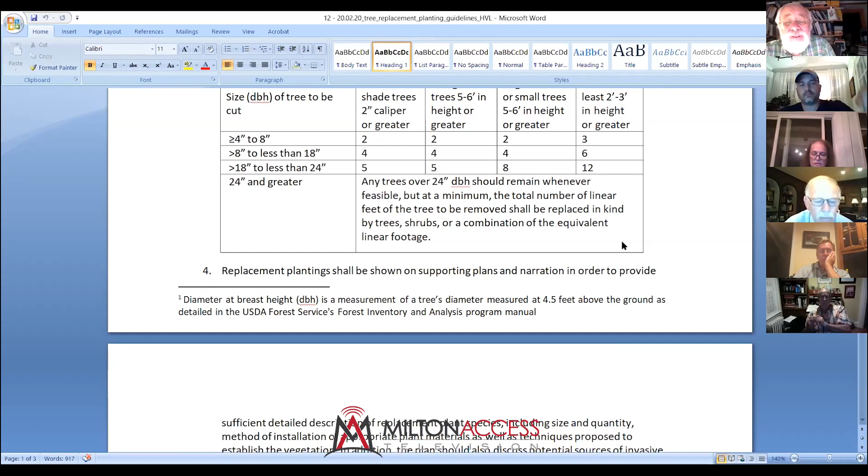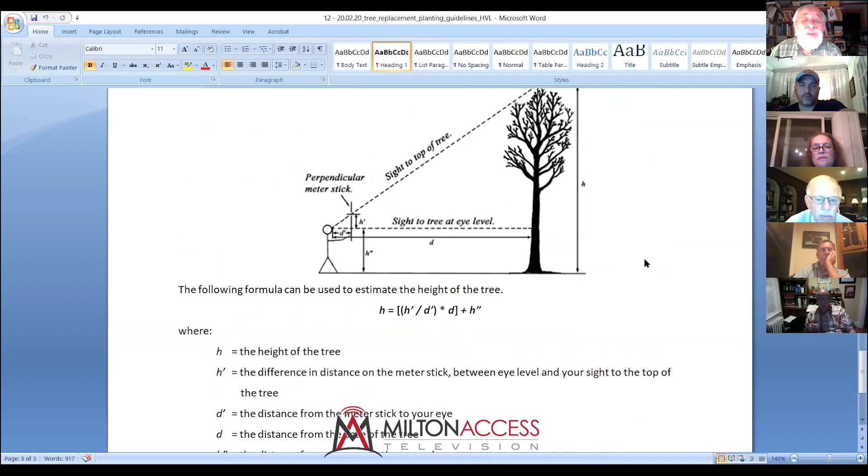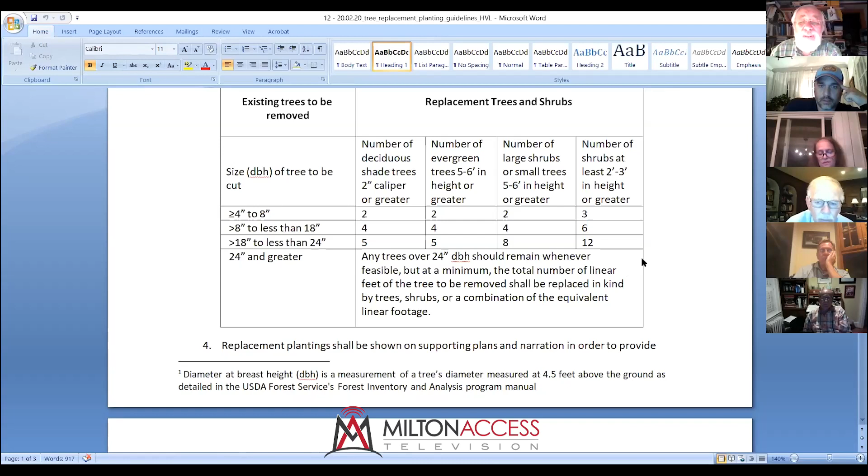Hans, can I stop you for a second and ask, what do you mean by linear feet of the tree to be removed? If you go to that last page. The last page? Okay. Right here. So measure the height of the tree. Right. So the linear feet, go back up to the description. Shall replace in kind by tree, shrubs, or combination of the equivalent in linear footage. So if it's a shrub, 2 feet plus 2 feet plus 2 feet, whatever it takes to get to. Oh, you're talking about the linear height of the tree. Yes. Okay, because that's unclear to me at least. I had the same confusion. Thanks for asking that.

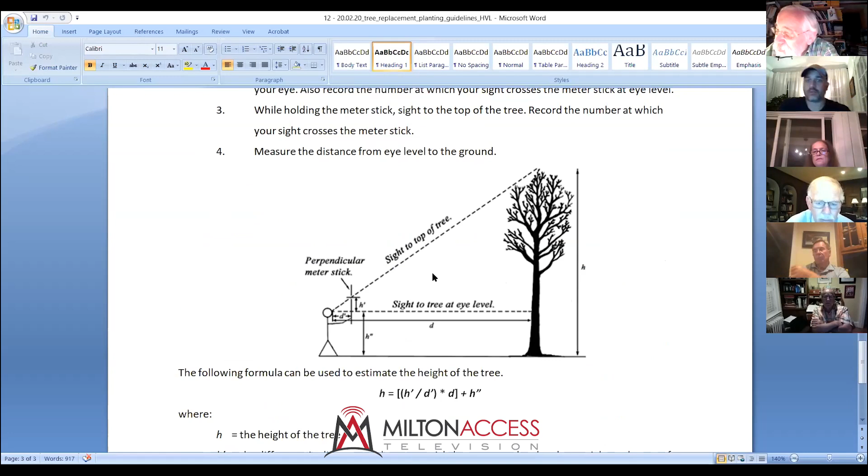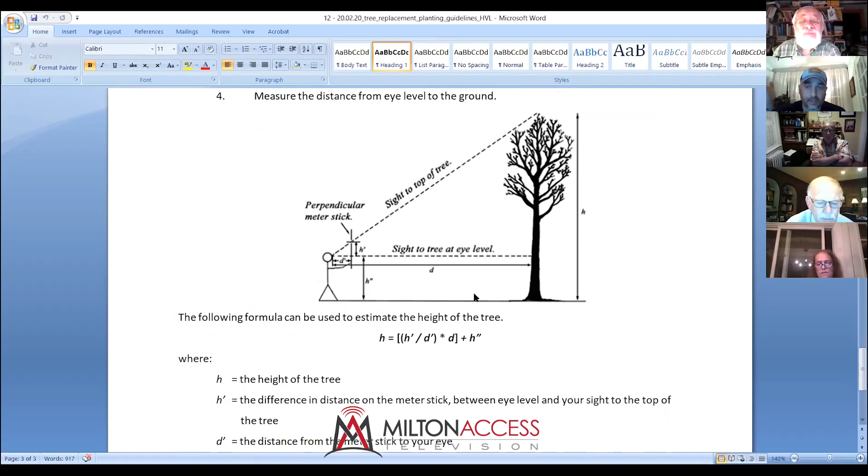Sure. My intent was to account for the best approximate biomass of the tree. Obviously we won't be able to account for the branch spread, but at least for the length of the trunk. If there's any way to clarify that, I welcome any input. I'd just say the tree height, and here's an example of how to estimate it. Just turn it to the height of the tree to be removed, in feet. That's all. Okay. That'd be great.

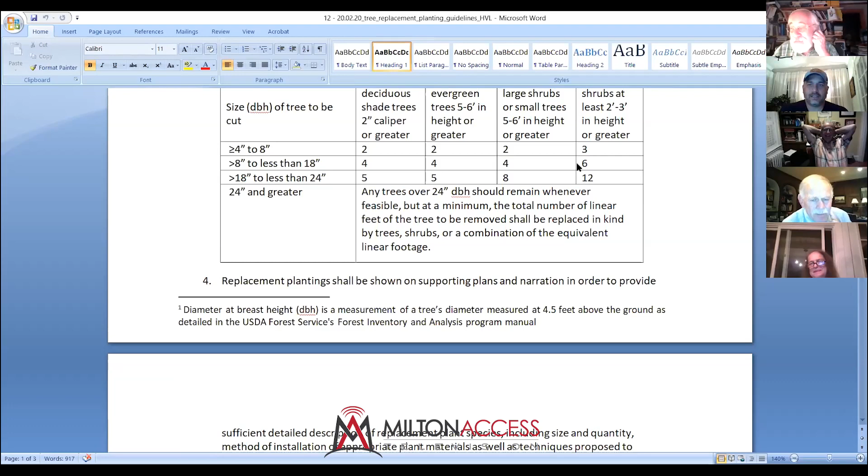We used to do the same thing in Boy Scouts. This is right in the Boy Scout manual of years ago. Maybe that's where I stole the detail from. Good. There you go. No, it's the right way to do it, unless you have a clinometer in your back pocket, of course.

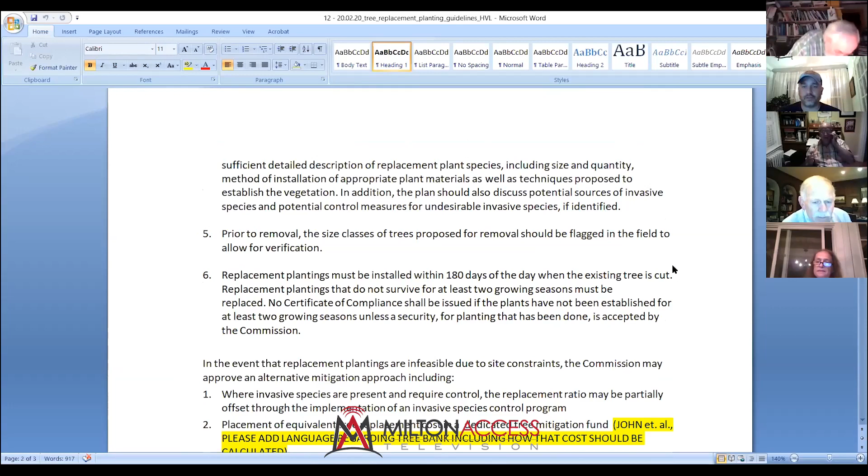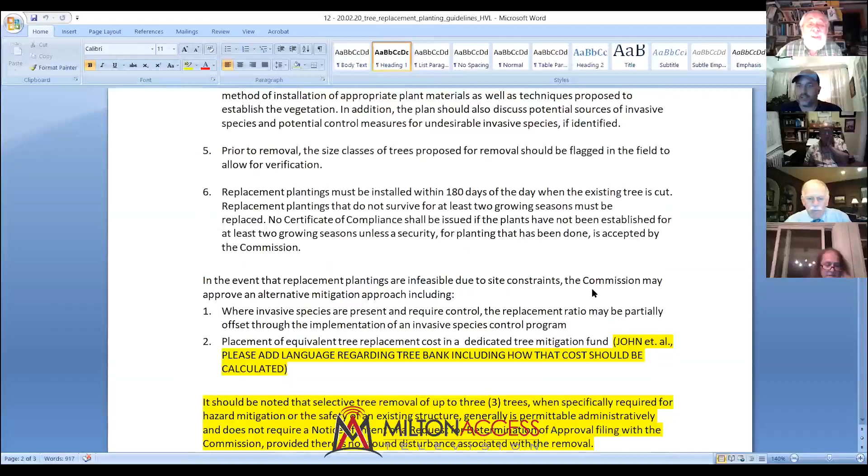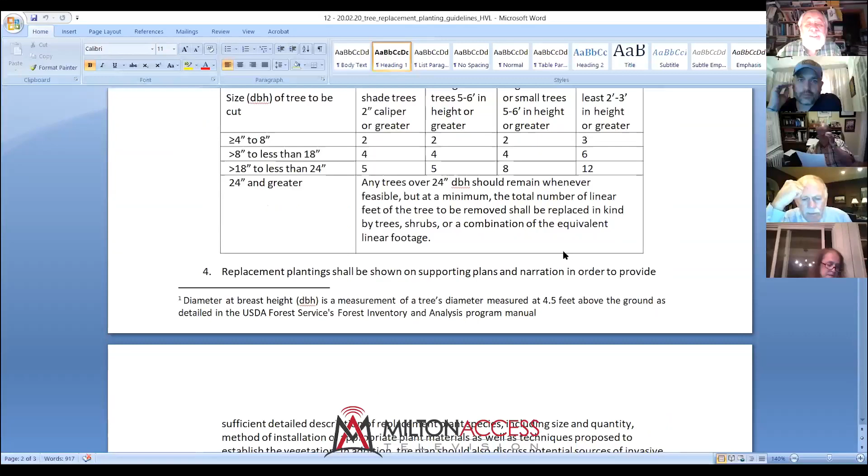I put in language for verification of that. And then this part down here, in the event replacement plantings are infeasible due to site constraints, I tried to formalize the in lieu fee type of mitigation, but I was relying on some input from John in that highlighted section on what's appropriate for providing the monetary calculation.

Yeah, we have bounced a bit on that, but it's generally between 400 and 500. That's a combination of the cost of the tree and the cost of planting. Yep. Because I think in combination, it may be $500. If you're talking about like a 2.5-inch caliper tree, that might be between $300 and $350 to buy, and then around $100 to $150 to plant.

It's based on estimates, but the estimates change over time and also depending on who you're talking to. And so we should come up with a consistent one, and maybe that's something that someone can try to formalize a bit better. Do we have a tree warden? Yes, we do. Maybe they can provide some input on that cost. Something that we can reference over time, to be updated periodically.

Well, DPW received a grant of $43,000, 3 years ago? And that's when the Shade Tree Advisory Committee came to us and appeared before the commission, and they were asking us for a donation at the time, but they didn't really have the financial backup as to what they needed it for. And at the time, they had this grant to the DPW that was going to fund trees. So that kind of got stalled, and they never really got back to us on that. I think primarily the reason was that they had money in the till, so to speak.